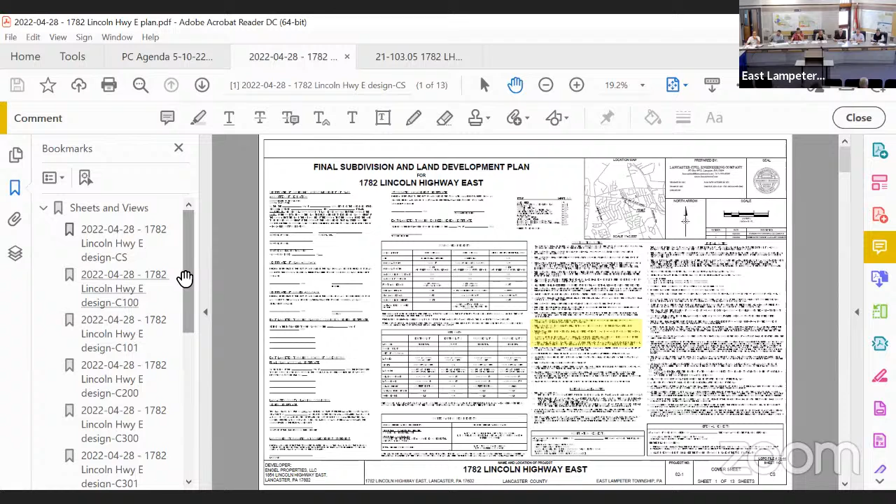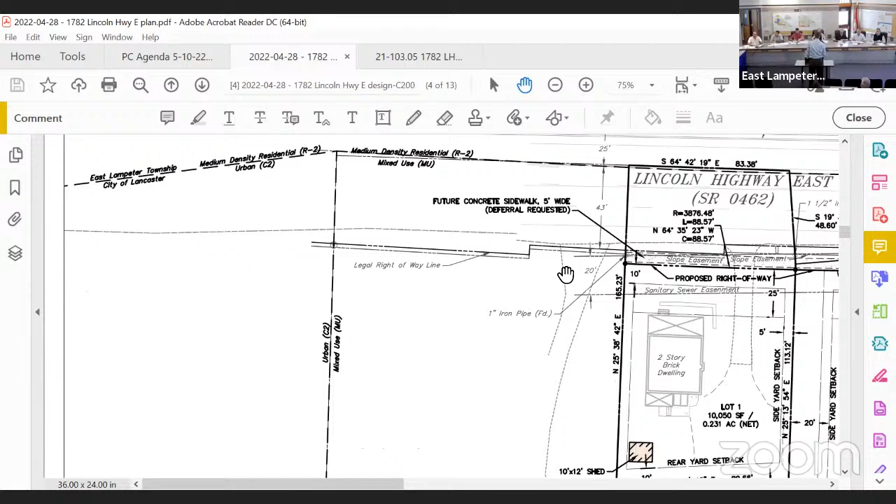Next item on the agenda is old business. None this evening. Under new business, we have Plan 2021-32, Engel Properties, Final Land Development Plan. If you could identify yourself, and I believe the mic's on. Here's the mic, thank you. Sure. My name is Ben Craddock. I'm with the Lancaster Civil Engineering Company. I'm here with Elvin Engel from Engel Properties, and we're here to ask for your consideration of the project before you.

There's 2 lots under consideration. The first is 1782 Lincoln Highway East. It's an existing single-family residence. The existing 2 lots are right around a ½ acre each. That's actually the proposed condition, but in the existing lots, lot 1 faces Lincoln Highway East, and lot 2 is kind of like an L shape that goes behind it. And that's a vacant lot.

It fronts on South Eastland. Mr. Engel would like to reconfigure the lots a little bit, make lot 2 a little bigger, lot 1 basically at the minimum size, and then construct a 12-unit apartment building on lot 2. That's what you see on the screen there, the proposed building on South Eastland with the driveway and apartment facilities. The corner of lot 2 is reserved for a stormwater facility. We've designed the basin to capture and infiltrate the entire 100-year storm from all the impervious areas, so we don't expect any negative impacts downstream.

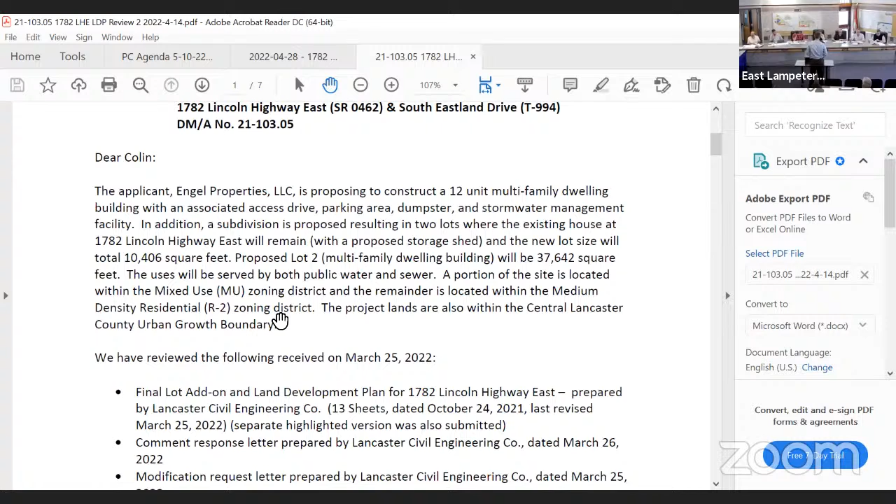And that's really about all there is to it. We have a review letter from David Miller Associates. I could go down through and answer any questions, or go through the modifications, however you want me to proceed. Yeah, we had the review letter from April 14th, and then we had 2 reply letters from you in regards to that review letter. Yeah, I think of my 2 responses, one responds to the comments individually, and the second one, I believe, was an updated modification letter. Okay. Right, to some of the waivers and to the comments. Correct.

Yeah, if you have a letter, if you want to go through. Would you like me to go through? You can start with the waivers. The waivers? Sure. The waivers, first one is a modification of section 303, the preliminary plan. We're not phasing the project, so we're asking for the preliminary plan to be run along with the final plan. Plan scale: the ordinance specifies 50 or 100 feet to the inch, and we're doing this at 30 feet to the inch. It's a little closer.

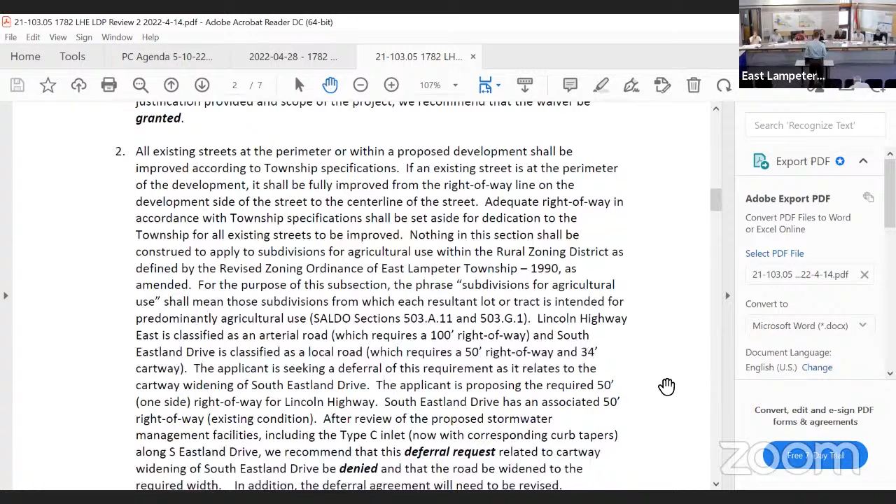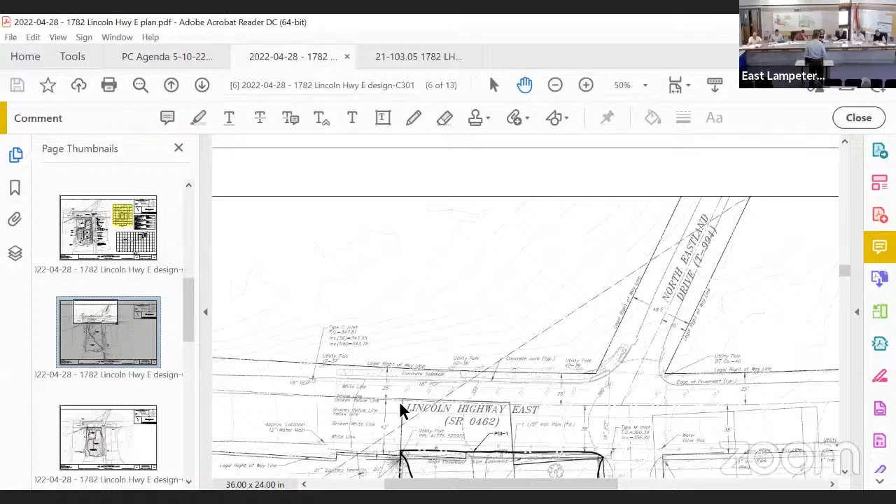Curb along all new parking lots. That's a modification of section 504A. We're proposing curb alongside the apartment building and, if I remember right, around some of the radiuses, but not along the backside or on the edge where we want stormwater to run off. So we're providing partial curb along the parking lot there. Now, my understanding is that curbing will be between the parking lot and the building itself? Correct. Just on that side, and then around the island, not in the back? Yes, sir.

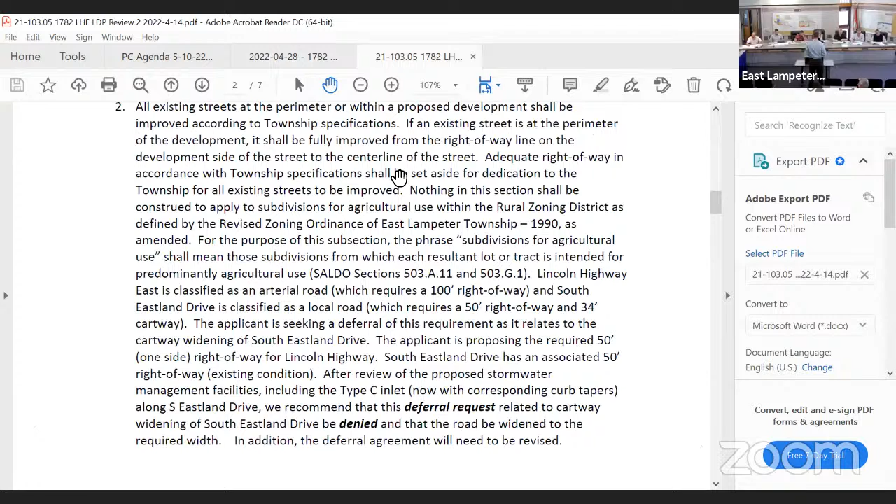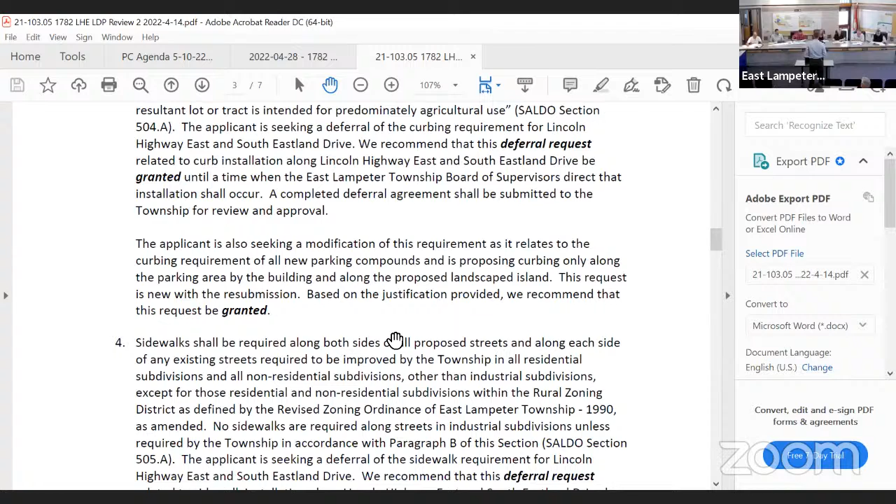We have a modification of section 302A2C for the loading ratios. Our loading ratios are higher than what the ordinance allows or what's recommended by DEP. But we do have a fairly low depth in the facility. The loading ratios are there to make sure you're not putting too much water in one spot, and the fact that we have only 0.88 feet shows that we're doing the same thing. We just didn't meet the loading ratio requirements.

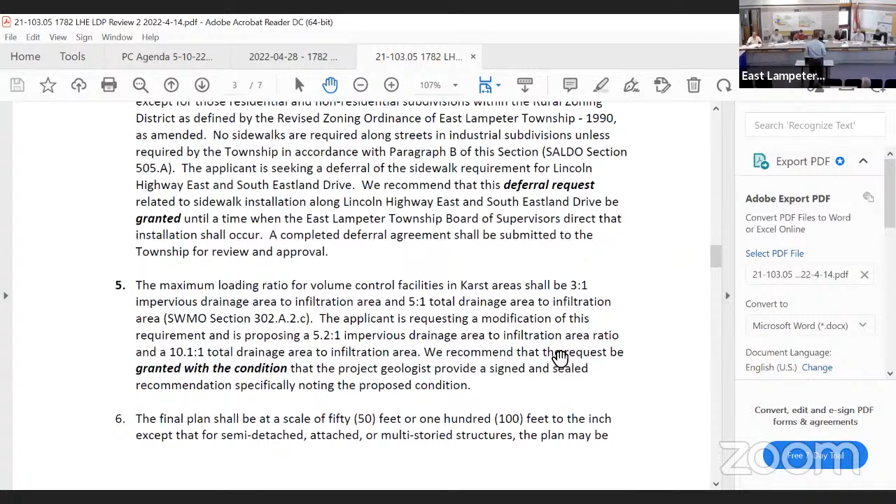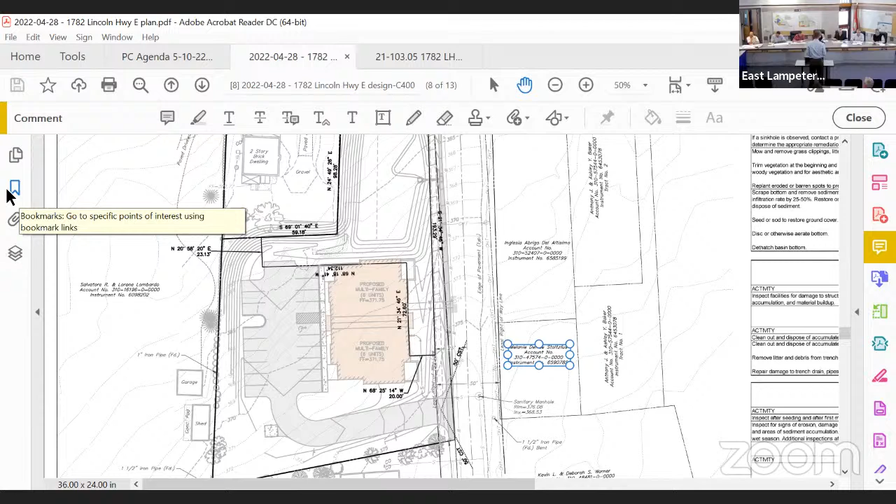Next modification is minimum pipe diameter. We have one inlet proposed along South Eastland Drive, and it collects water from South Eastland and pipes it into the stormwater facility. Our stormwater facility is at a certain elevation because we have bedrock and we're trying to keep it above the bedrock. With that elevation, we can't fit a 15-inch pipe in there, so we're asking that a 12-inch pipe be allowed. It exceeds the capacity for a 100-year storm, and it's not even in the roadway. It just goes from the inlet into the property.

The last one is the 100-year dewatering time. The 100-year storm dewaters in, per our calculations, 42.5 hours, and it's supposed to dewater in 24 hours. This is due to the on-site infiltration rates that we experienced. Not a whole lot we can do about that, but I did point out in the letter that the total dewatering time of rate control and volume control is less than what's allowable in the ordinance if you add both together. So we're asking for that modification.

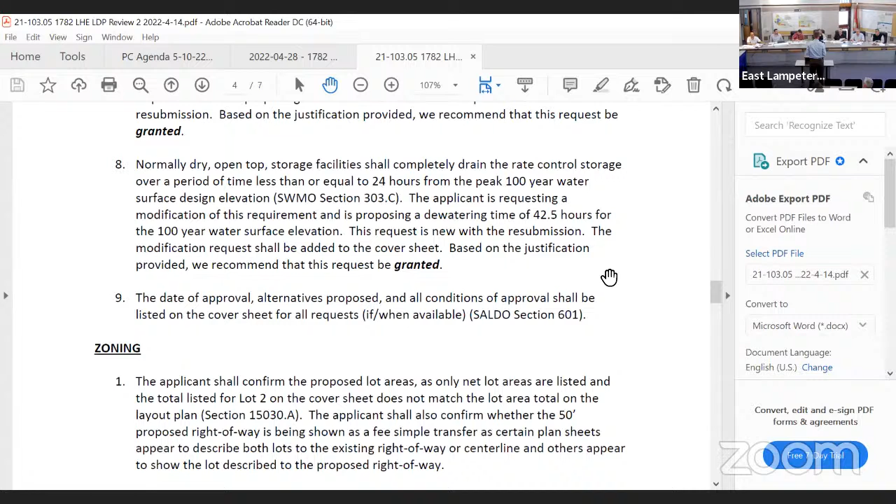And then finally, we're asking for 2 deferrals: installation of curb along South Eastland and Lincoln Highway East, and also sidewalks. So if you recommend approval of these, the owner would still be required to do them whenever the township asks, just not right now. Any questions I can answer for any of those modifications?

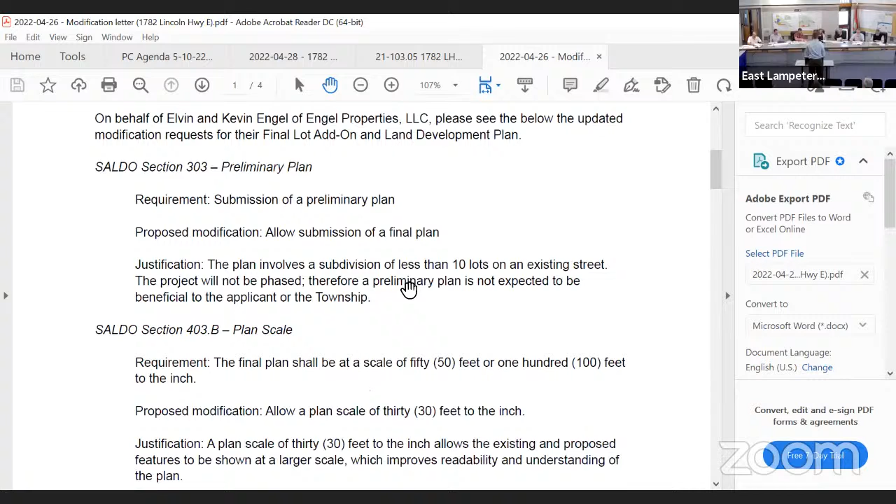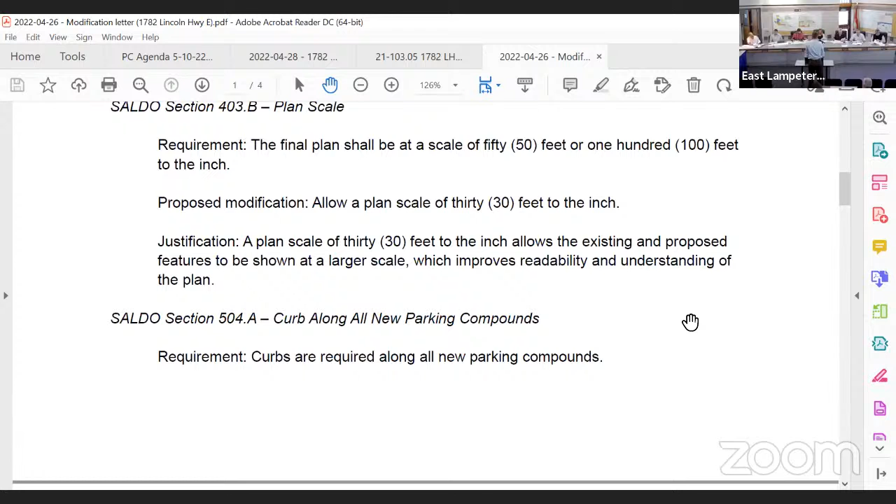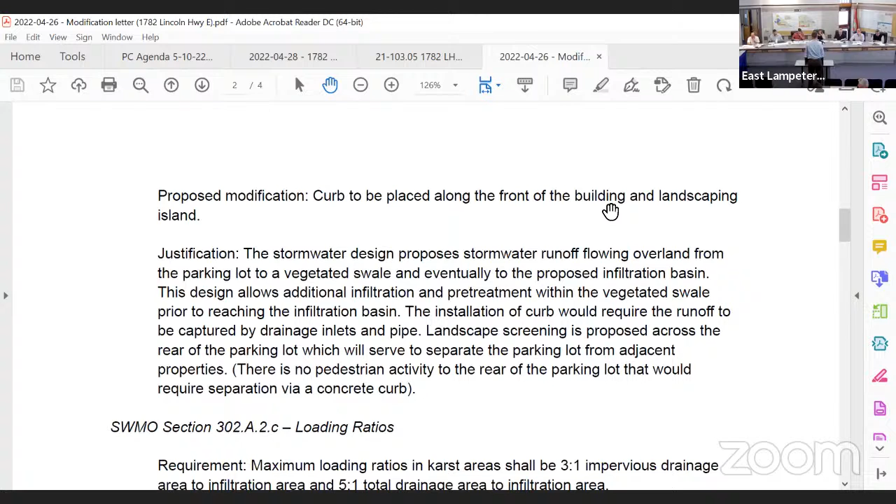Just to avoid some confusion, he was following his April 26th reply letter, which was in a different order than the review letter. He did make some modifications to the original request after the review letter was done by our engineer. Yes. So, to help understand, I read your other letter of April 28th, comment number 2 under waivers, where you said, we request that the deferral request for the widening of existing streets be withdrawn.

So what's the status of Lincoln Highway? Is that at the proper cartway width? It is, yes. Okay, and South Eastland is a little narrower than it's supposed to be, so we're proposing to widen that. So you will widen. Right. Now, we talked about curbs in the parking compound. What about curbing on the street and sidewalk? That is one of the deferrals that we're asking for, curb and sidewalk on the street. That would be under a deferral agreement. Yes, sir.

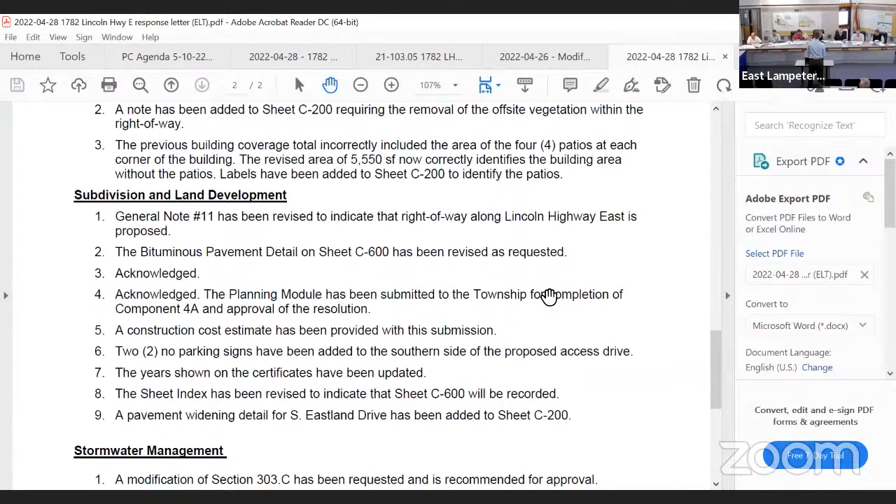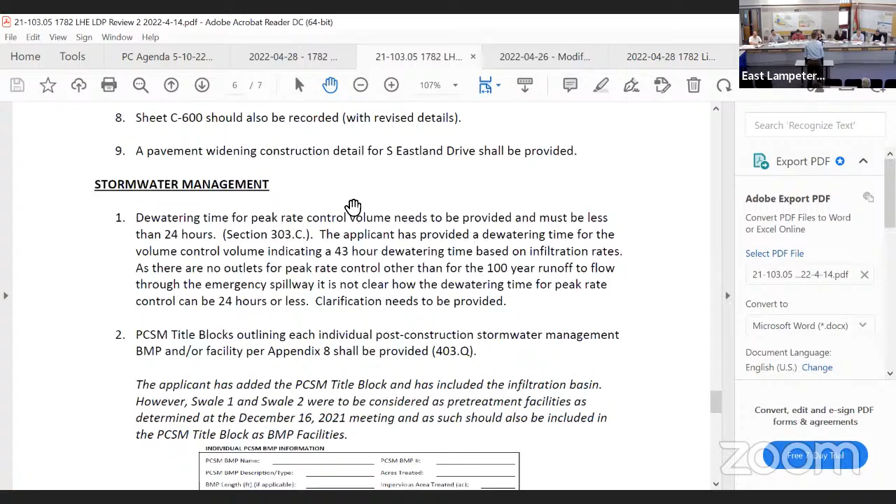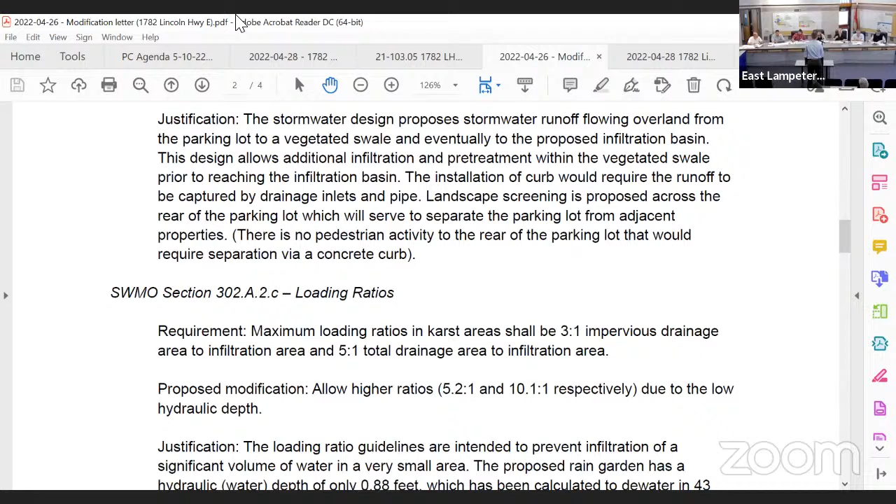And so the only sidewalk you're providing at this time is the piece between the parking lot and the building. That's correct. Okay. I'm guessing these are rental units? Would be rental, okay. Would there be any value in sidewalk? Well, the building, the way it's located, we have a proposed plan here. Is there a front or back to the building? To some degree, it looks like the back of the building faces Eastland and the front would be the parking lot. You're showing some patios on the one side, which typically is the back of the unit.

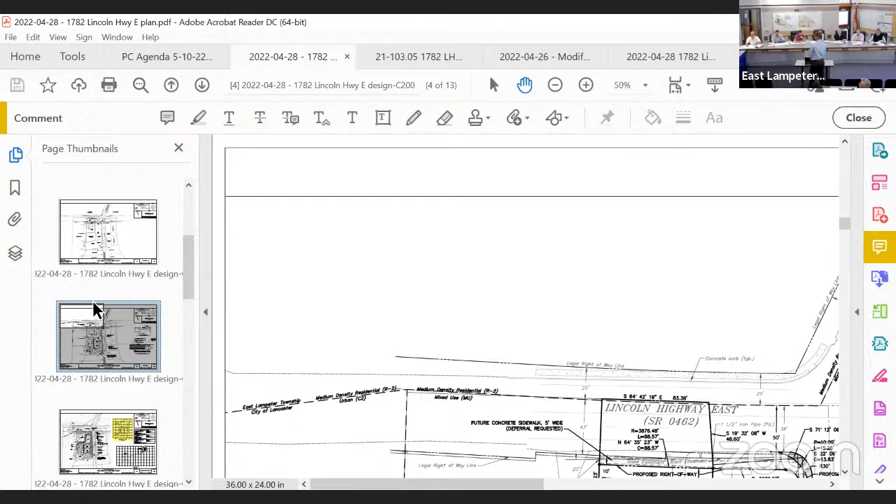So will they enter the units from the Eastland side, or from the parking lot side? We'll enter from the parking lot. Okay. Yes, sir. Yep. Okay.

So would there be any need to have sidewalk on the property down to Eastland in the future? I'm guessing that, as more public transportation gets promoted and used, to get them out to Eastland or even out to Lincoln Highway for a bus stop or a bus pickup. But currently there's only the driveway into the property as far as the hard surface to exit or enter the property by car.

Yeah, I was just talking. Have you looked at the Bridgeport Crossroads plan at all? That's prepared and finalized last June, July. There are proposals for improvements from the Bridgeport intersection east, west on Lincoln Highway, out towards the Ritas and a little further, include several recommendations, sort of any stage.

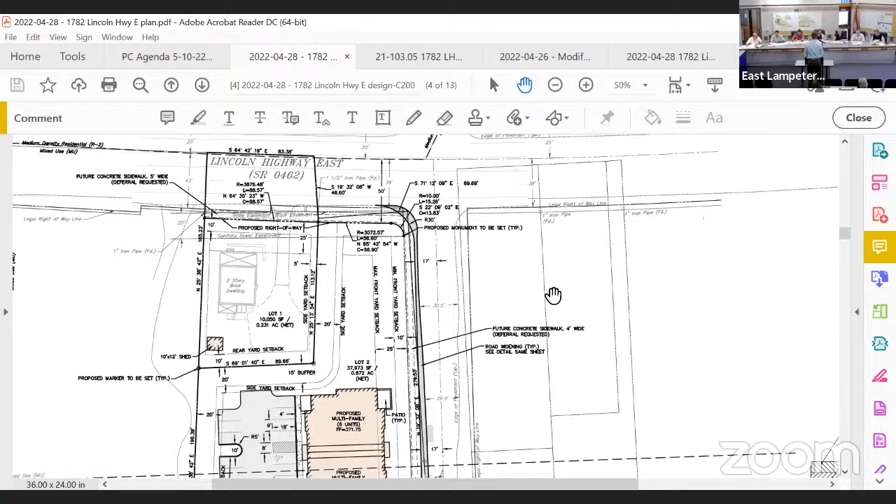It's recommended along the whole length of it, I believe, but it's not in final plan, if you will. There was a final recommendation through that study. A lot of that was centered on the intersection of Bridgeport at the Weis Markets and all there. I'm sure you've driven it. It's a difficult area. There's no pedestrian provisions. It's difficult for bicycles. It's really a vehicular hazardous area right now that needs improved. So the proposal would be coming out along there.

And as you had, the portion of your property next to Lincoln Highway is mixed use, so it's interest in business and residential. So my interest in this discussion was just getting people a pedestrian way on your property to the right of way. We met with township staff. They kind of have the same questions as well, as far as whether people could access from the front of the building. Right now, we're not proposing a connection because the sidewalk's not there.

But it'll be a hill coming down off the sidewalk from South Eastland because the property will sit lower. So if we put something in there, eventually it'll be a stairway or something like that from that breezeway up to the sidewalk. For the time being, we expect them to use the access drive. That's the way they're going to be used to going in and out, and it's going to be the easiest as far as topography to get in and out.

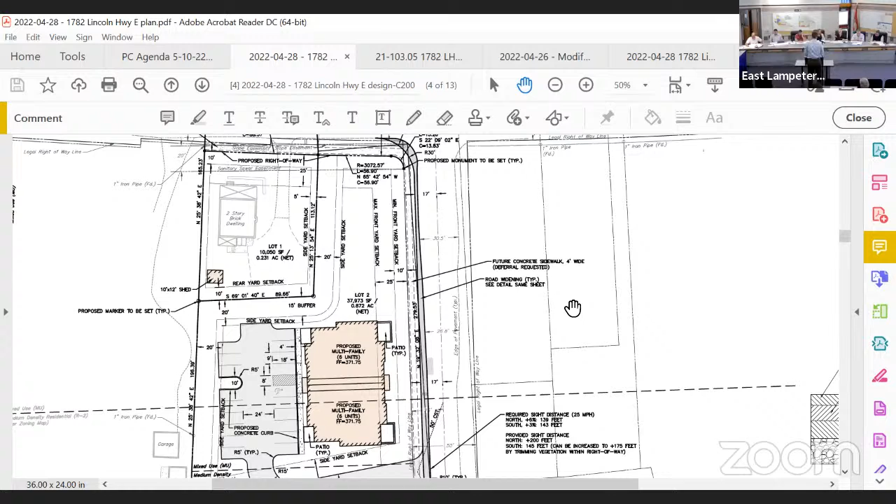Any questions on the waiver request? And then there were 3 items under zoning, which you had provided a response to, and those items you can finalize with our zoning officer. Yes. And that we don't have any leeway on, so that's under subdivision and land development.

There were 9 comments. And there was a favorable reply to all of those, if you have any questions on those. No, I felt pretty good about addressing all of the things. And then stormwater, there were 2 comments, which you addressed, agreeing to what was recommended, and then the dewatering time, which we talked about, and the PCSM title blocks.

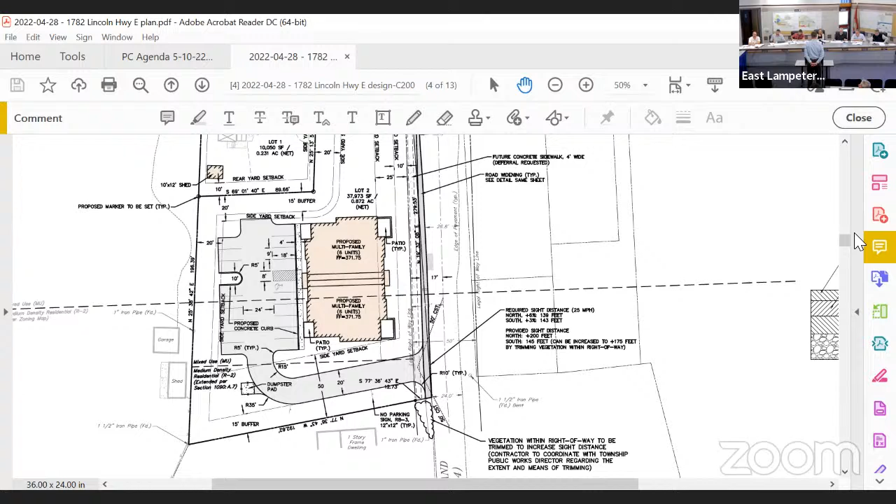Just to confirm that that would not be an accessible access. No, but it would be more accessible than stairs. Sure. Is that something you would consider doing, adding that sidewalk from the parking lot to Eastland? It doesn't have to be along the driveway. It can be along the building edge from the edge of the parking lot on a straight line to Eastland. The south side, right where she's showing the arrow. It's an internal sidewalk, so I don't know if there's a width requirement for the township, so it could be 3 feet.

And after the existing sidewalk parallel to it, just give you that walk and do a 90 degree turn southeast is what we're looking at. And to be honest, we'd be happy with a landscape walkway of some kind, permeable gravel or something. It's a flat surface so people don't have to walk in the driveway, but they can get to Eastland.

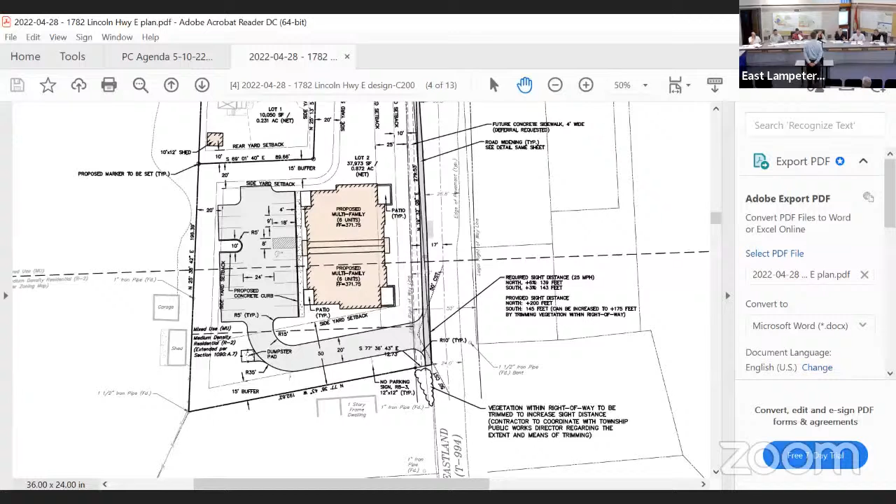So we have the motion. Do I hear a second for the motion? I'll second. And a second. Any discussion? Hearing none. All those in favor, say aye and raise your hand. Aye. Opposed, abstaining, none. Thank you for your presentation. Thank you very much. Thank you.

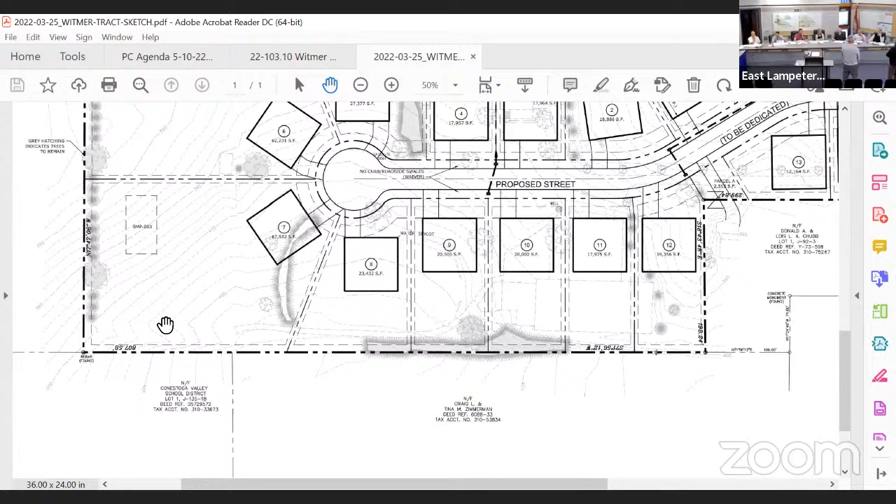And secondly, we're a little reluctant to provide a trail through private properties to connect to the school because we know that it's going to be school children that are mostly going to be using it. There's not an HOA. It's just going to be in an easement. It's not going to be a right of way. So we're a little reluctant to provide that. So we wanted to get the feedback from the planning commission on those items.

So one of the thoughts that we had was rather than provide the connection this way, that there could be a connection come down this way. There's also going to be a lot of add-on connection with the Chubb property, and speaking with township staff, we understand that we do have to make the road frontage improvements on Mount Sidney on that property, also because it's going to be part of this plan.

Currently, there's a shared driveway with the horse farm and the Chubb property. Rather than have them connect out to Mount Sidney Road with another driveway, we're going to provide them access through here so they can connect their driveway to this cul-de-sac.

Is the Chubb property where, I guess a couple of years ago, the double wide, the trailer went in? Yeah, I think it's a Cape Cod style kind of house. Right, okay, I remember that going in. Oh, okay. Yeah, it doesn't even look like it faces, it has a Mount Sidney Road address. If you drive by, you wouldn't even notice it. The house is back here.

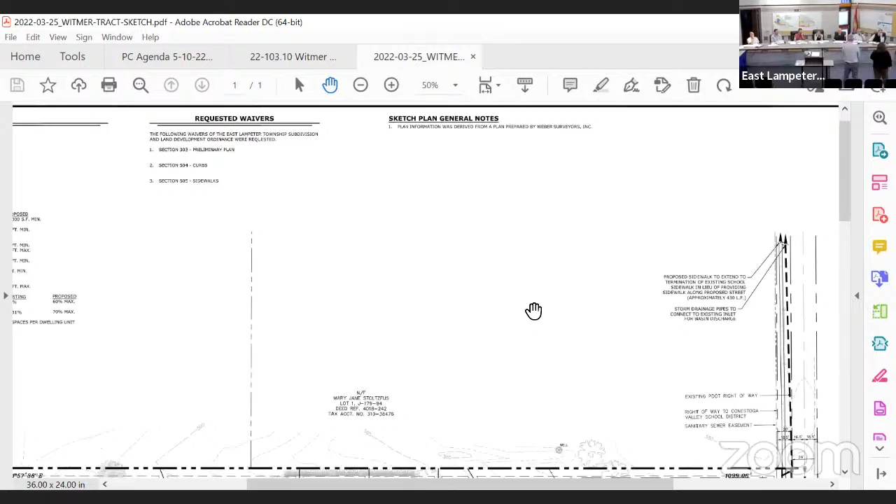Right across Suwan is the horse pasture that's currently being used. And then going down on your drawing is another fenced-in area that appears to not be used anymore. That's on the Chubb? There's fence there and it kind of blends with where the horse pasture is across from Suwan, but it doesn't appear to be used. Okay, so that's part of the Chubb property then.

Just to get some of our thoughts out there: if we're providing this connection here, then ultimately this could connect, and the school property actually comes out to Mount Sidney. It would make more sense to have a connection along Mount Sidney Road and then have the trail connect into the trail system on school property. And it's actually rather flat from Mount Sidney out to where the trail connection is. Yeah.

I was gonna say, do we have a trail plan? I'd ask if we had one. This is the master plan for the school. Colin may have a full size. I actually did walk this existing trail today. And it's not just a grade, they've planted it heavily, so it's a heavily landscaped route through there.

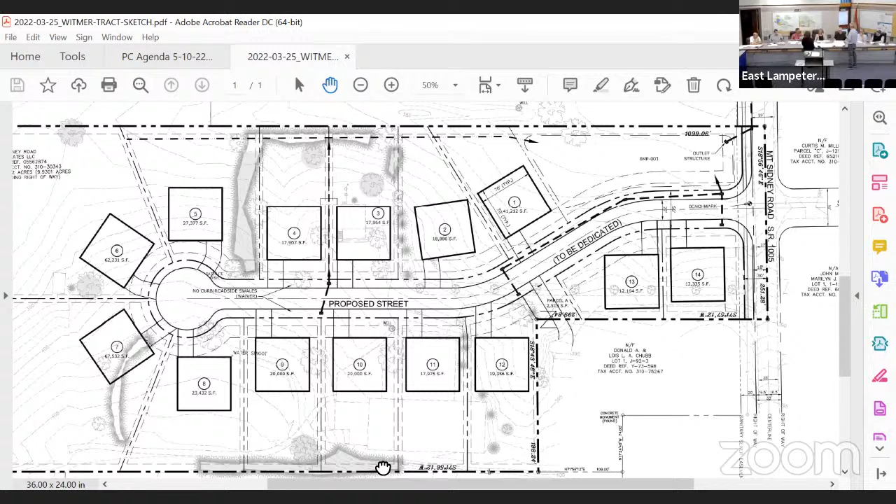Yeah, some form of sidewalk, in my opinion. I'm somewhat limited because it's only 14 homes and it is a cul-de-sac. It's not part of a larger development. We're not gonna get a higher volume of people, but then it's always a question of which side you put it on if you don't do that. It's just the symmetry for some. Just the appearance. It's nice to.

Yeah, for me, I'd like to see at least on one side. For me, it's a safety issue. Since it is a cul-de-sac, it's not like... It's not very easy, because there's not the same level of traffic. So, I'd be open to either. The consensus is you need sidewalk, whatever it ends up being.

Yeah, this is straightforward, like Joyce said in the beginning, it's not phased, it's all at once, you don't have preliminary and then phase 1, 2, 3, 4 with a final. Yeah, that's the easy one. Thank you for the input. Thank you.